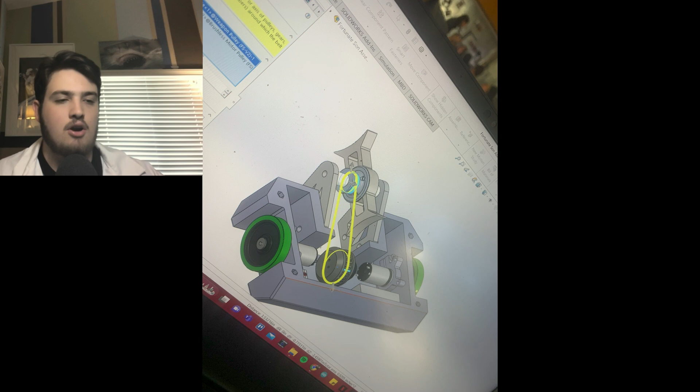So first, we started looking at some of the robots and 3D models of robots that they had brought in. They showed us ideas on how to get our weapon to move if we were going to use a moving weapon. Sort of just what do 3-pound robots look like? Because most people have probably seen or heard of the 250-pound robots, but 3 pounds, where do you even start? What do they look like? So we looked at the ones they brought, and that inspired us for our own designs.

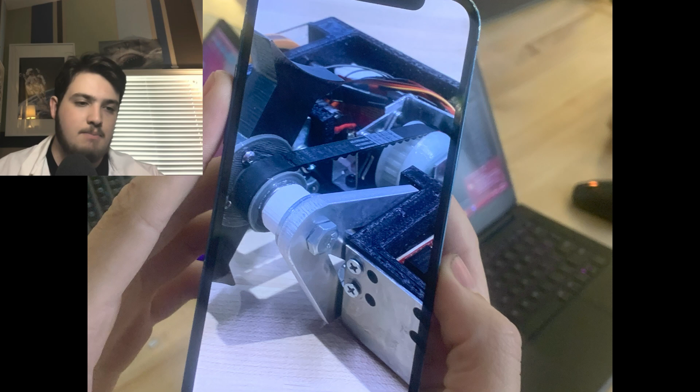For example, many of the robots used a brushless motor if you had a spinning weapon. You would use a brushless motor and a belt that would connect to your weapon. You can see some images here.

Also, they showed us different spinning weapons. There are many different types: vertical spinners, which spin vertically, horizontal spinners, which spin horizontally. There's also flipper bots, and there are wedges, which don't move at all. There's many different types of weapons you can choose to augment your robot with.

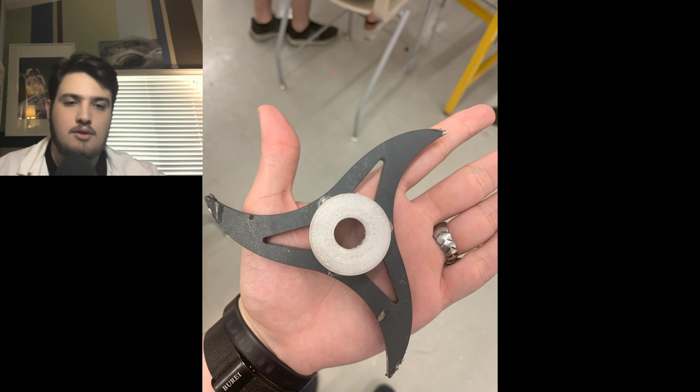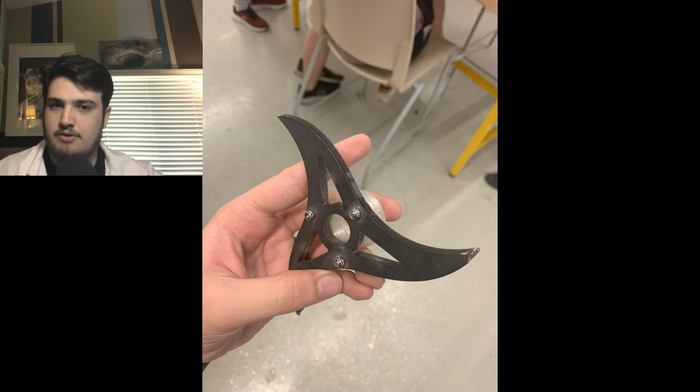We ultimately decided to go for a beater bar vertical spinner, based off of this triskeleton-like design that we saw. Now what's interesting is that this triskeleton design was actually meant for a horizontal spinner. Usually horizontal spinners are a little bigger versus vertical spinners, so we had to basically turn this horizontal spinner into a vertical spinner.

That was our main mission, because I really liked the design, so I brought it up in our design meeting when we were thinking about what kind of weapon to make. We decided to make a vertical spinner that was a beater bar. A beater bar, for those who don't know, is basically instead of one singular vertical spinning blade, you have two vertical spinning blades that spin at the same time. So we decided to go for the triskeleton type design we had seen.

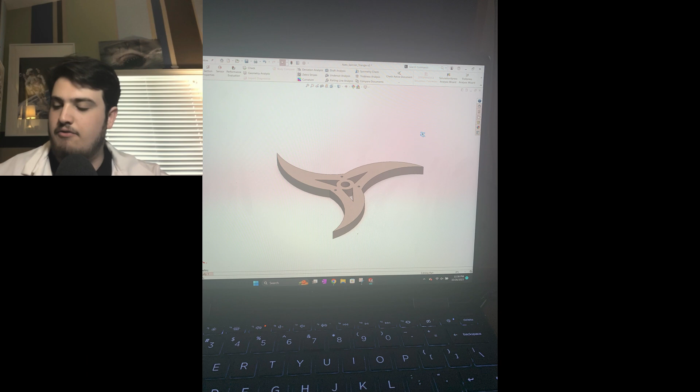And so then we got to modeling. We started by trying to model the vertical spinner. We had to go through a few different types of designs. I'll show you the one we landed on, but we ultimately landed on one that fit our weight requirements, because the robots are separated into weight classes: 3 pound, 250 pound. I think our spinners altogether weighed about half a pound together, because, like I said, it's a beater bar, so both blades weighed about half a pound or so together.

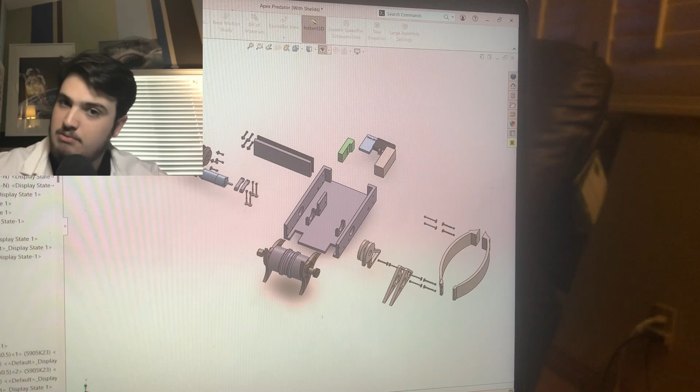Here you can see the complete CAD model for Apex Predator and all the parts coming together. You can see that the beater bar is the one in the front, with the two blades connected by a bar in the middle. That's why it's called a beater bar.

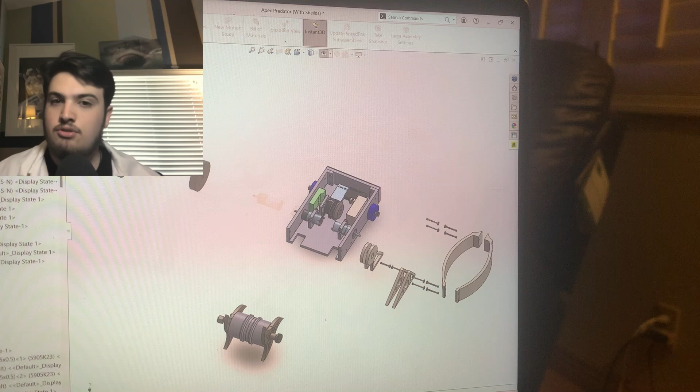Anyway, so Apex Predator's main design was that you just had the beater bar in the front, with everything protected inside. It used two wheels and then two smaller wheels that would just spin on their own to help distribute the weight, and then we had some protectors to protect the wheels.

So you can see us carving out the body and all the electronics, making a few prototype 3D prints and trying to see if it all weighed under 3 pounds. Luckily, we thought it did. It weighed almost exactly 3 pounds or so.

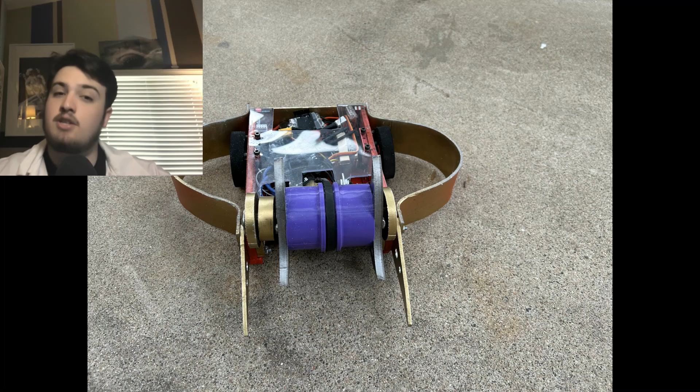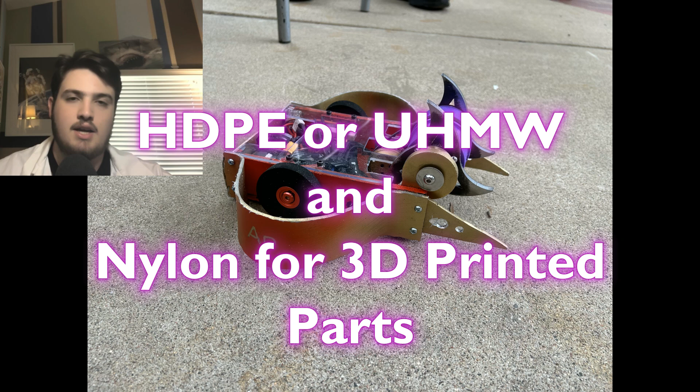Most of the materials were made out of either aluminum or a certain type I'm trying to remember what it was called — I can't remember what the blades are made out of, but I'll put up the name right here. The rest was made out of a certain type of plastic, I can't remember the name, but I'll put it up here. And then lastly, I can't remember the name of the clear plastic either, but I'll put that here as well. Those were the main materials we made it out of. You can also notice we decided to get rid of the extra wheel because of weight reasons.

And so yeah, this was Apex Predator in all of its glory. Anyway, we ran into a problem.

You can see here that we are trying to fix Apex Predator, because if I'm being honest, what happened was we made the design, we made the prototype, but we didn't give ourselves enough time to test the prototype. So we ran into multiple problems.

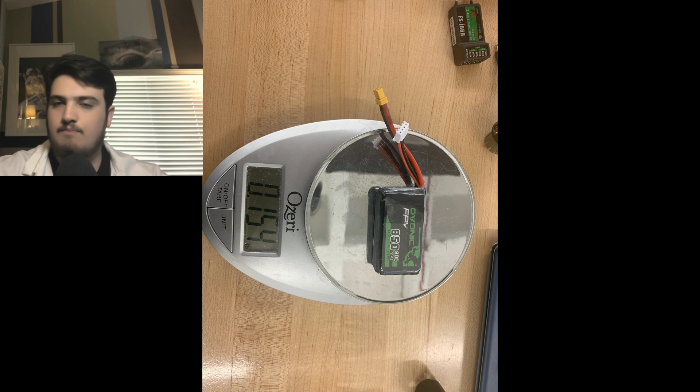Some of the problems we ran into was simple stuff like weight. We had to get rid of some weight because, I don't remember the exact number, but we were supposed to be 3 pounds or under. We were like 3 pounds and less than an ounce. Whatever it was, it was enough that we had to get rid of some weight.

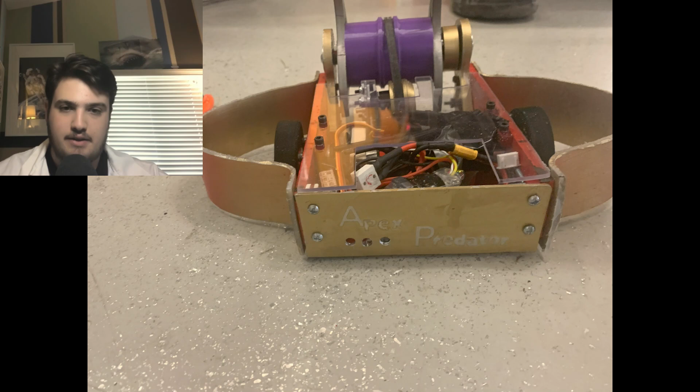So we had to take off our little wedges in the front, and remove material from the back. You can see the three little holes we cut into our aluminum back plate. I think that was pretty much the only thing we had to do. We didn't have to do too much else, but there were more problems than just the weight.

Now you'll see if you look at where the beater bar is and the belts, you can see that it's at an angle. Basically, in the CAD model everything worked perfectly, but when we put it into real life, we messed up the measurements by very slight amounts on each of the walls that we made.

What we should have done, and what we did do in the next generation of Apex Predator, is we should have 3D printed the walls we needed and used those measurements to cut out the walls from the stronger plastic we were actually using. But we didn't end up doing that—or I think we tried, but we didn't do it very well.

Anyway, the point is, as you can see, everything looks kind of not put together correctly. It looks slightly slanted, just off. And that was enough that it deviated enough from the CAD model to cause a problem with the spinner, where it wouldn't spin correctly.

Well actually, I don't think it was that it couldn't spin—I think it couldn't spin at all, or it could only spin for a slight second. It was something of that nature.

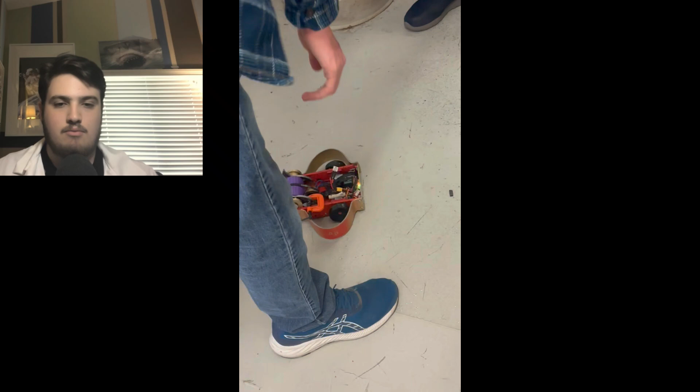But there was also one other problem, and I have a video where, because of that same slantness that caused our weapon to not spin correctly, there was also a problem with the wheels that drove the robot. It did move, but it could only move in a circle. For whatever reason, the other wheel wasn't working that well. I think we had a faulty motor, but it was also simply, like I was talking about, everything wasn't put together correctly.

So basically, Apex Predator, the height of all 3-pound robots, didn't work very well. He was basically a snail. He could only move a little bit, he could barely attack, he had a little bit of armor. He was basically a snail. He was destined to die. And well, that's when it all fell down.

You were the chosen one!

So you can see us here introducing Apex Predator. We're a beater bar vertical spinner. Guards—as you can see, we love our coloring. It's a very, very fancy looking robot. What are you guys most excited for?

And then this was right before our first battle. Our first battle was against basically a joke bot. This joke bot, however, moved super well.

You can see it here moving, and all it did was it had a spatula and it slapped us. We could barely move—I don't even think our weapon was working. This was our first year, so maybe you could cut us some slack.

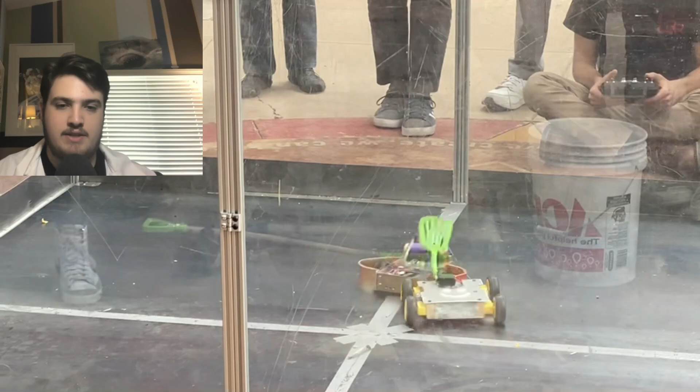We tried to keep working on the problems throughout that day, trying to fix it. But we didn't really fix it enough in time, so we had to go against another opponent.

I don't exactly remember the name of this other opponent. We were able to move a tiny bit again. I think our weapon motor spun for a second, maybe - actually no, it doesn't look like it did. But he was a horizontal spinner, and he hit us once or something of that nature. The other robot was also having trouble moving, so it wasn't able to hit us a whole bunch.

Again, this was mainly just first year robot builders, and we were basically just going against each other in our own school. This was more of an in-school tournament, so it was more like practice for a real tournament, you could almost say. It was a real tournament, but you know.

Anyway, we got hit once - you can see it there - and we basically got destroyed. I don't really remember all the damage we took. I have some pictures here, but it was pretty bad.

We had to basically revamp a lot of stuff - not revamp, we had to replace or fix some stuff. We didn't take a huge amount of damage, but took enough, and we decided we really needed to fix Apex Predator. We really needed to fix him.

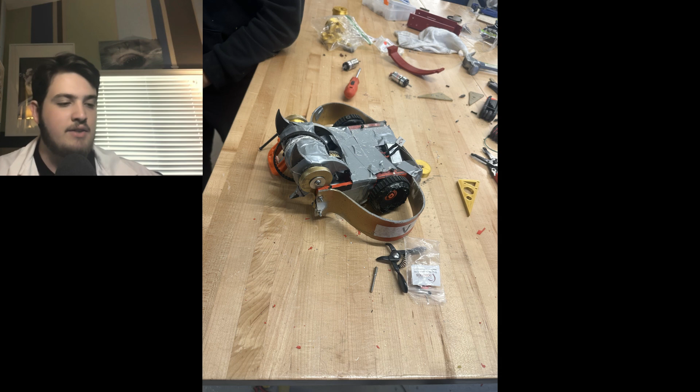But he was no longer Apex Predator. We had this whole speech about how bad he was, how horrible he was, and how it drove him to madness. Apex Predator's foundation was his pride, but after losing 2 matches and basically becoming unusable, he broke down. He then lost his wife, his kids, his family. His boss fired him, he lost his business, his car. All that remained in his heart was his rage, his uncontrollable rage. And now all he wants, all he wishes for, is vengeance. And so that's when we came up with our new iconic name: Vengeance.

The hell are you supposed to be?

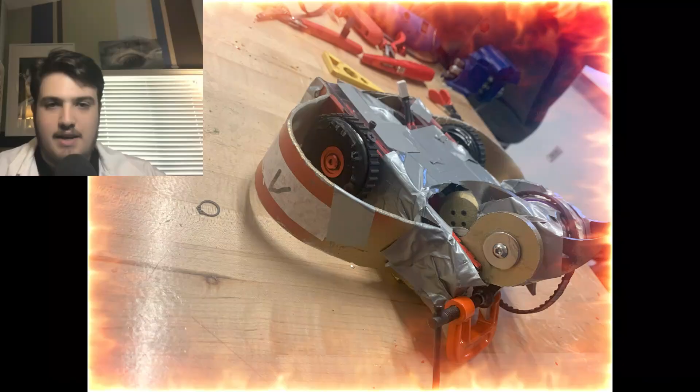I'm Vengeance. And so we wrote it on him. We covered him in duct tape, tried to make him look a little better, a little more beat up, a little bit more like Vengeance.

And lo and behold, we were actually able to fix him a little bit. So at the very end, we had already lost our 2 matches, and so we didn't do another match. I think you could do as many as you wanted, but we only ended up doing 2 because we just needed more time to fix Apex Predator, who had now Pokemon-evolved into Vengeance.

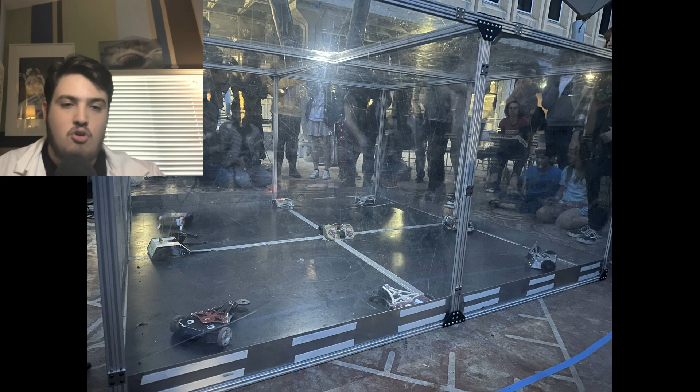And so at the end of the battle, all the robots that could still kind of move had an all-out brawl between pretty much any robot willing to get in on the action. And we got so hyped up because our vertical spinner was actually moving correctly.

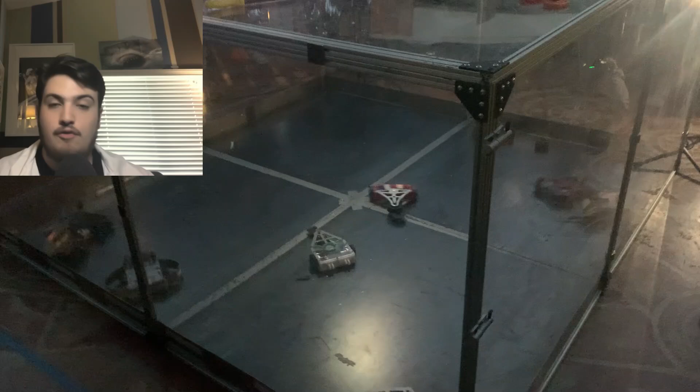I think we maybe hit one person, I'm not exactly sure, I'll show you in the video. But yeah, we were actually able to move a tiny bit. We couldn't physically move the robot that much - it was still kind of wonky in the sense that it really only wanted to go in a circle. Our driver was pretty skilled though, so he was able to make it move a tiny bit. We mostly were just able to turn our robot, so if someone came near us, we could at least try to hit them. I think we still only ended up hitting someone once, maybe twice.

Yeah, it was pretty fun, and we were pretty hyped up that Vengeance had actually been able to take a little bit of vengeance on somebody.

So that was the story of how Apex Predator was designed, fell off horribly, and next was the rise of Vengeance.